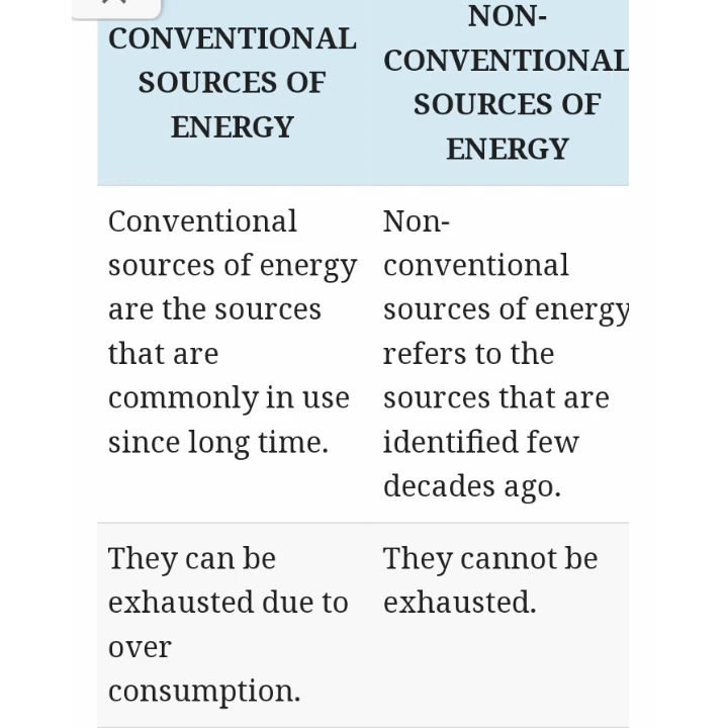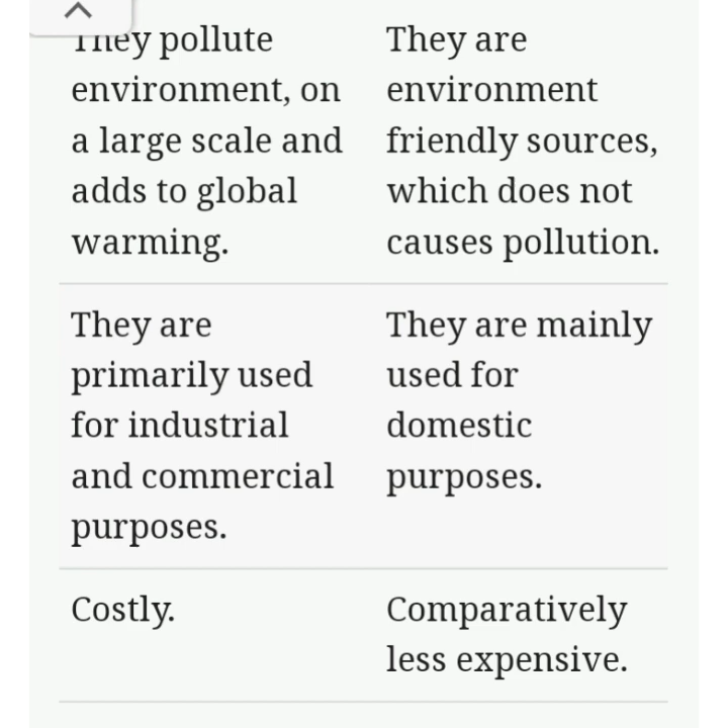Now let's compare conventional with non-conventional. Conventional has been used for a long time, but non-conventional sources have been identified just a few decades ago. Conventional is exhaustible, but non-conventional is inexhaustible. Conventional pollutes the environment and brings large scale global warming, but non-conventional causes no pollution. Conventional is mainly used for industrial or commercial purposes, while non-conventional can be used for domestic purposes. Conventional is very costly, but non-conventional is less expensive.

Now let's go to our first non-conventional source of energy, that is solar energy. What is solar energy? The energy that we get from the sun is called solar energy. We traditionally use solar energy for drying clothes, obtaining salt from seawater, and drying food grains.

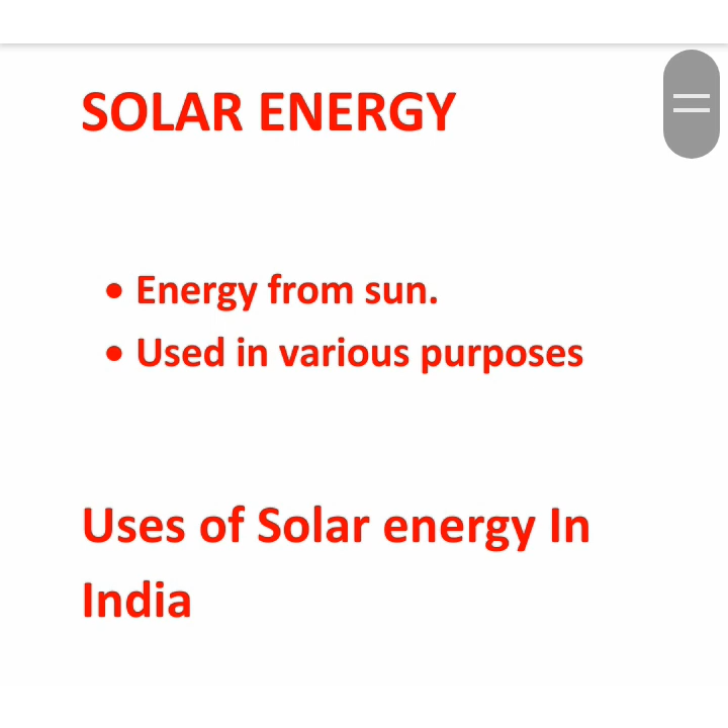Considering our country's location, it is advantageous for harnessing solar energy because it receives a higher amount of solar energy equivalent to 5,000 trillion kilowatt hours per year. The location on the Tropic of Cancer is one of the best advantages, which gets 300 clear sunny days in a year.

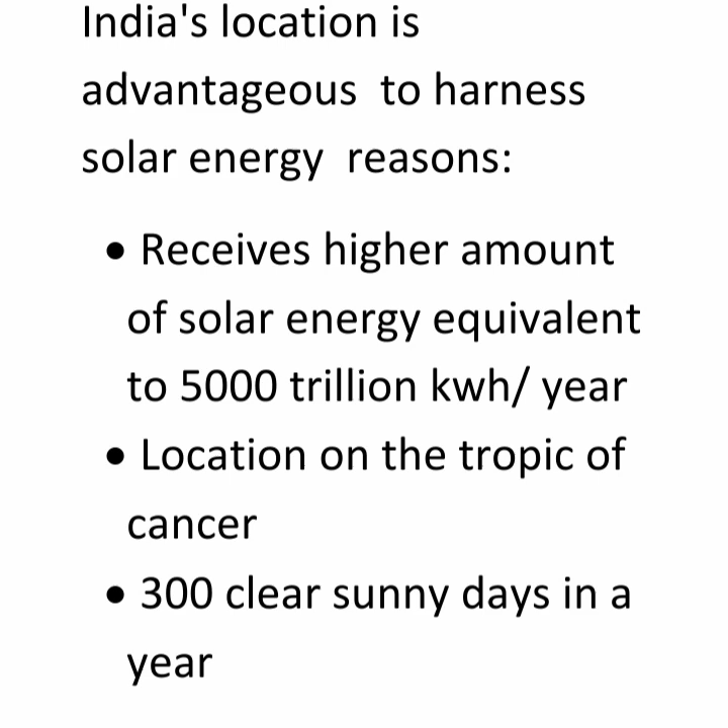Several techniques have been developed in India for harnessing solar energy. Our first device is solar cells, also known as photovoltaic cells. These cells are made up of thin wafers of semiconductor materials like silicon and gallium. When radiation strikes this device, the energy of the sun is directly converted into electricity.

Solar cells are used in many devices like calculators, electronic watches, street lighting, traffic signals, water pumps, and many more. Now the solar cooker.

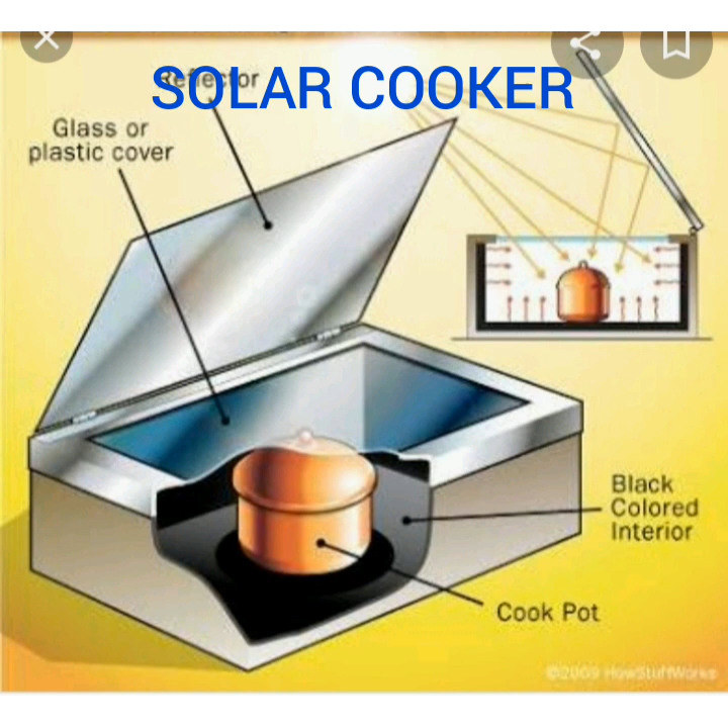The solar cooker is an insulated box with thermocol lining from inside, fixed with aluminium and painted black from inside. It is covered with a glass sheet, and the lid is made of a mirror. The glass sheet helps trap heat, and the mirror helps reflect light rays into the box. The container to be cooked should be painted black from outside and placed inside the box.

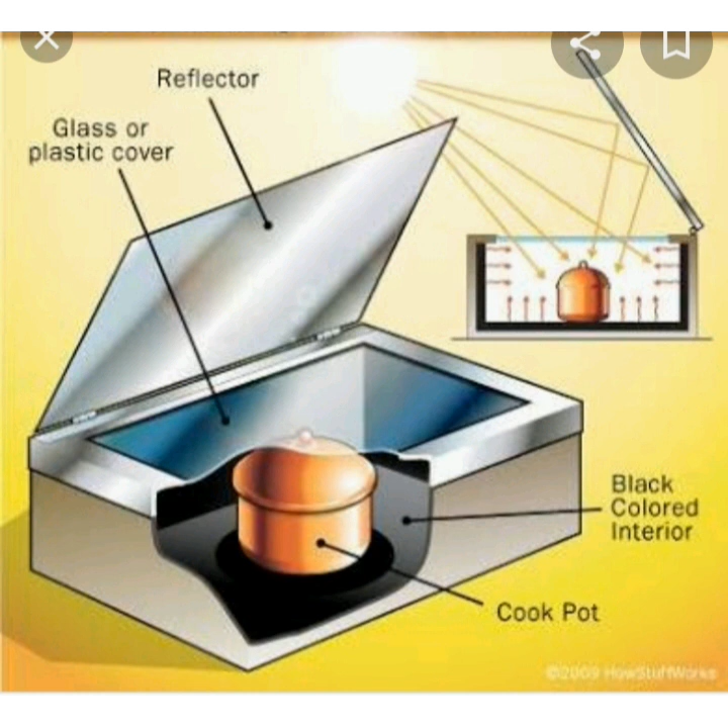The box is kept open in the sunlight. The energy from the sun enters through the glass sheet into the box, but it cannot escape because of the glass sheet. Thus, more and more heat is trapped, and this is how food is cooked in the solar cooker.

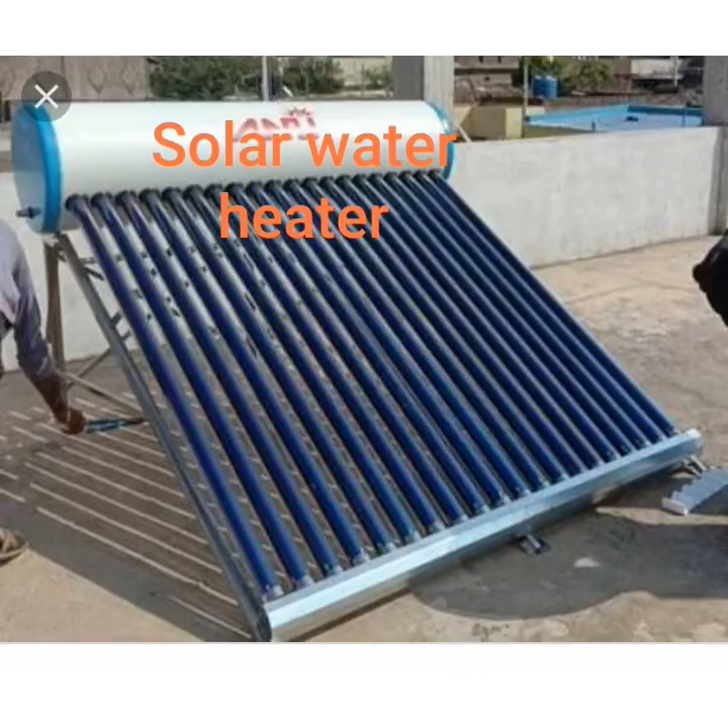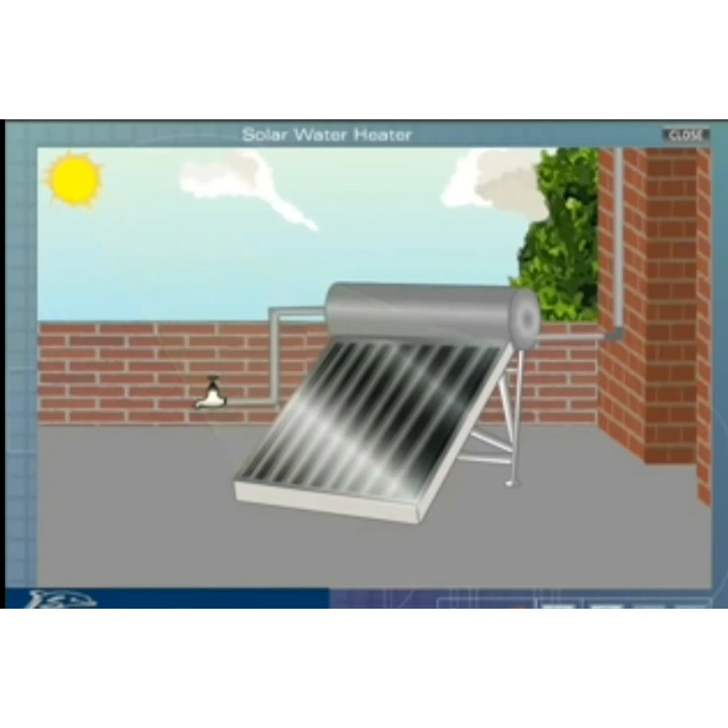Next, the solar water heater. It is one of the most successful applications of solar energy, used in the field of heating water. Now let's see the working. The solar water heater consists of an insulated box painted black from inside.

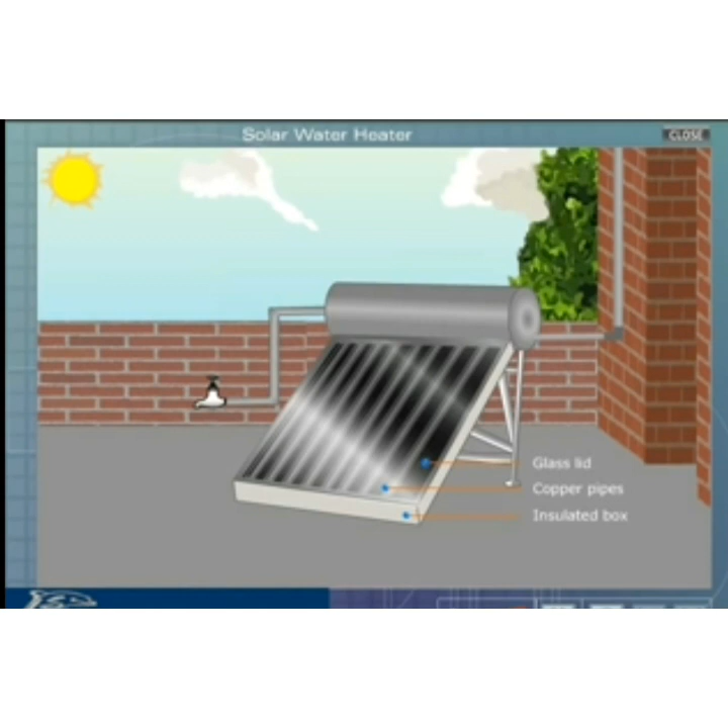In this box, copper pipes are fitted in the form of a coil, and these pipes are painted black from outside. The box is covered with a glass lid to prevent heat loss due to convection and radiation. The ends of the pipe are connected to the storage tank. Cold water enters the storage tank from the bottom and flows into the copper tubes.

The infrared radiations from the sun get trapped inside the box. As a result, water inside the copper pipes gets heated and becomes lighter. The heavier cold water from the storage tank, at a relatively lower temperature, flows down into the copper pipes, and the lighter hot water flows into the storage tank. This circulation continues, and the process by which water gets heated is known as the thermosiphon effect.

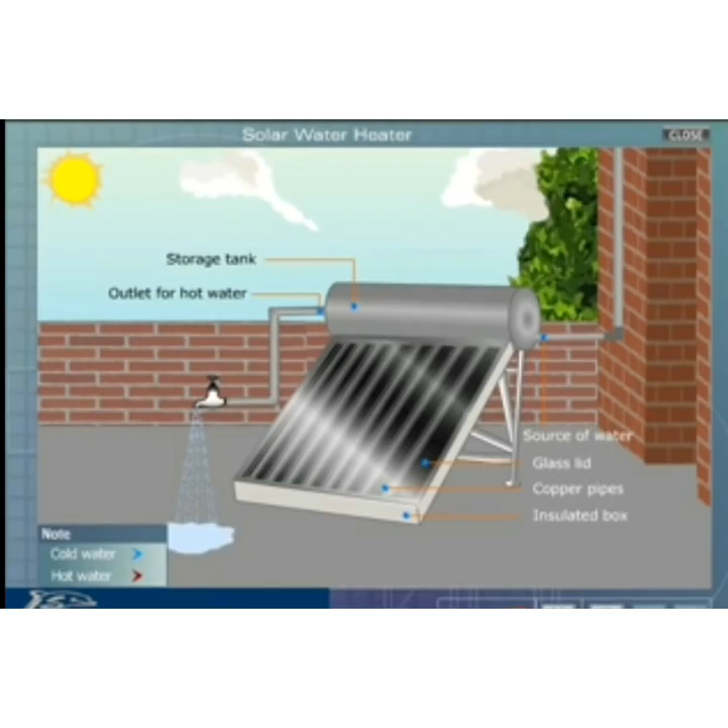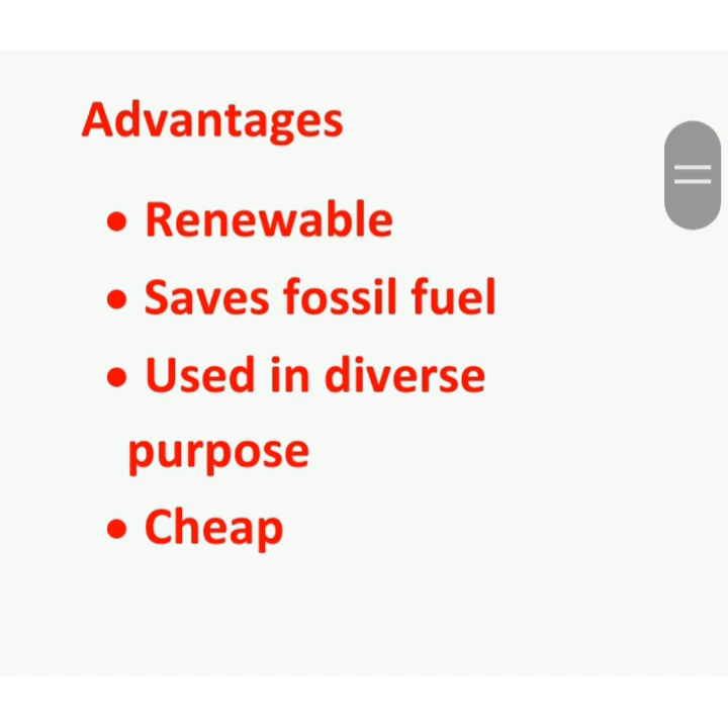Thus, we get hot water by trapping solar energy, which is renewable, non-polluting, and abundantly available. The advantages of solar energy: it is renewable, it saves fuel, and it is used for diverse purposes like extracting energy, electricity, and distilling water. It also saves fossil fuels and is cheaper.

Moving to our next non-conventional source of energy, that is wind energy. Wind is an inexpensive, reliable, non-polluting source of energy for generating electricity. Wind energy is generated from moving air, that's wind, mostly with the help of windmills.

Wind energy is obtained by making use of a windmill, where the blades rotate due to the force of the wind. The rotational motion of the blades drives a number of machines like water pumps, flour mills, and electric generators. A number of windmills are installed in a definite pattern, called a cluster or wind farm, to generate a large amount of electricity. Wind farms are installed in coastal regions, open grasslands, or hilly regions.

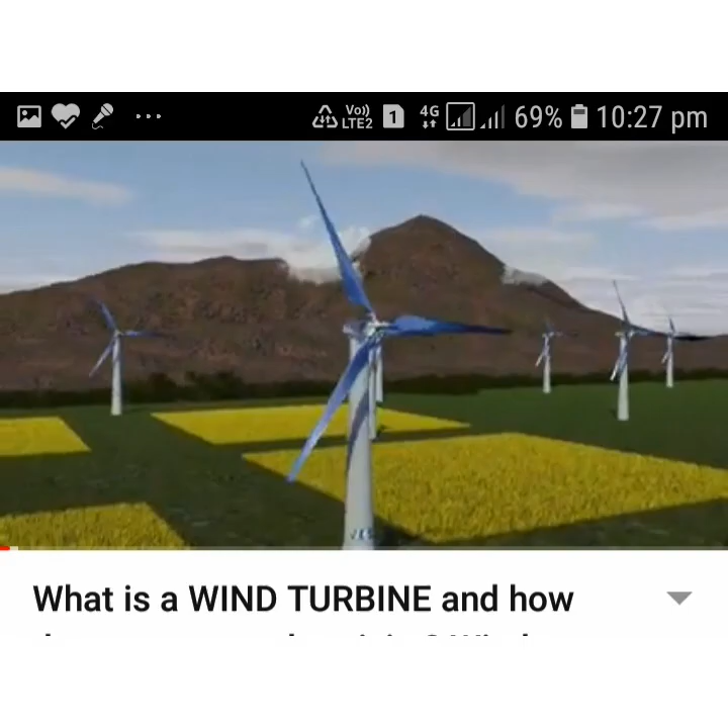India's wind energy program is the fifth largest in the world after Germany, Denmark, USA, and Spain. In India, the largest wind farm cluster is situated from Nagercoil to Madurai in Tamil Nadu. Besides this, Andhra Pradesh, Gujarat, Karnataka, Kerala, Lakshadweep, and Maharashtra have important wind farms.

Advantages of wind energy: it is a renewable source of energy, as we all know, and it can be utilized again and again. It is the cleanest form of renewable energy which produces no pollution at all. It reduces our dependence on fossil fuels, and it helps in generating electricity which can be used for domestic purposes and reduce monthly electric bills.

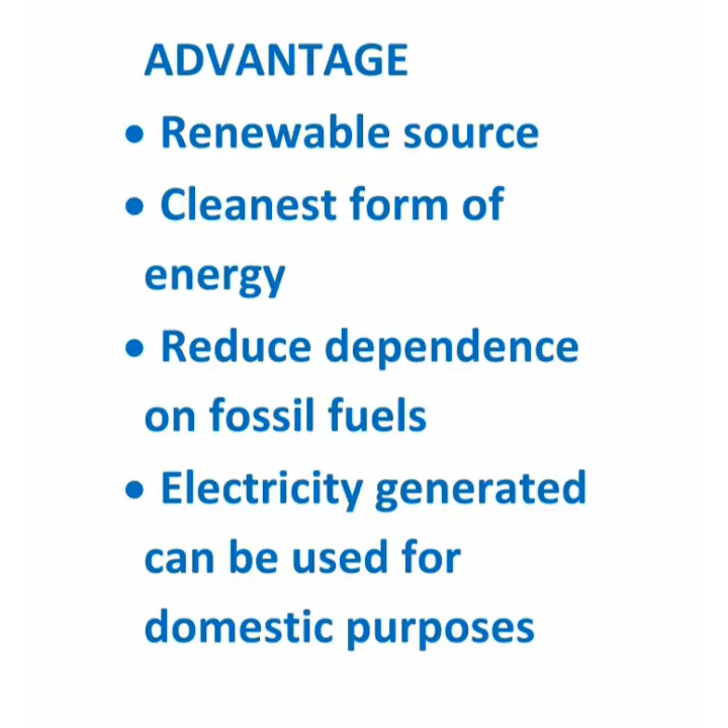Let's go to nuclear power. The nuclear power is another non-conventional source of energy. The energy is stored in the nuclei of the atoms of naturally occurring radioactive elements like uranium, thorium, and plutonium. The nuclear energy is utilized to generate electricity in the nuclear reactor or nuclear power plant.

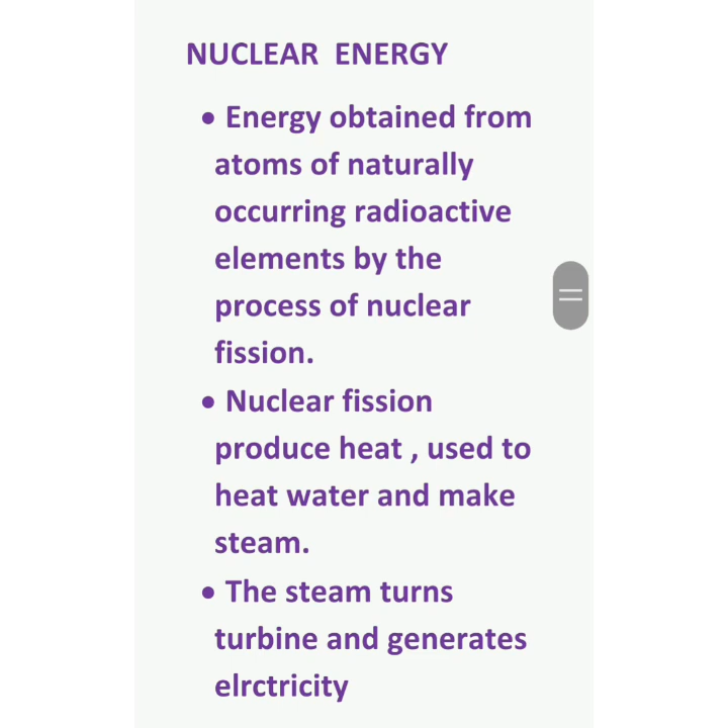Now let's see the working of the nuclear power plant. What is the block diagram of the nuclear power plant? We can see here the different components of the nuclear power plant. The main component of the nuclear power plant is the nuclear reactor, a device in which the process of nuclear fission takes place. The uranium-235 is subjected to nuclear fission in the nuclear reactor, and a huge amount of heat is liberated.

This heat then goes to the heat exchanger. For that purpose, a coolant is used, which can be of gas or liquid type. The coolant transfers the heat from the nuclear reactor to the heat exchanger, and in the heat exchanger that heat is transferred to the water. When the heat gets transferred to the water, the temperature increases and water gets converted into steam, which is then converted into high pressure steam that rotates the steam turbine.

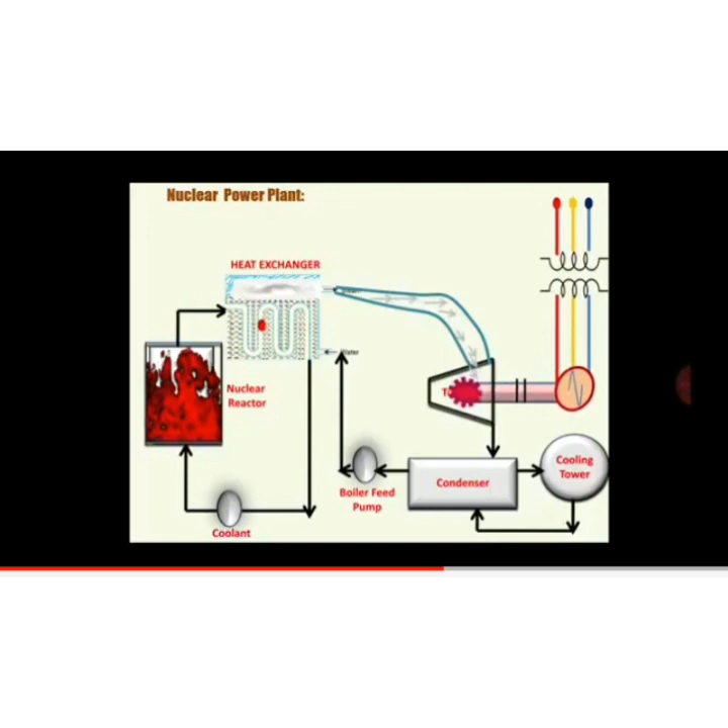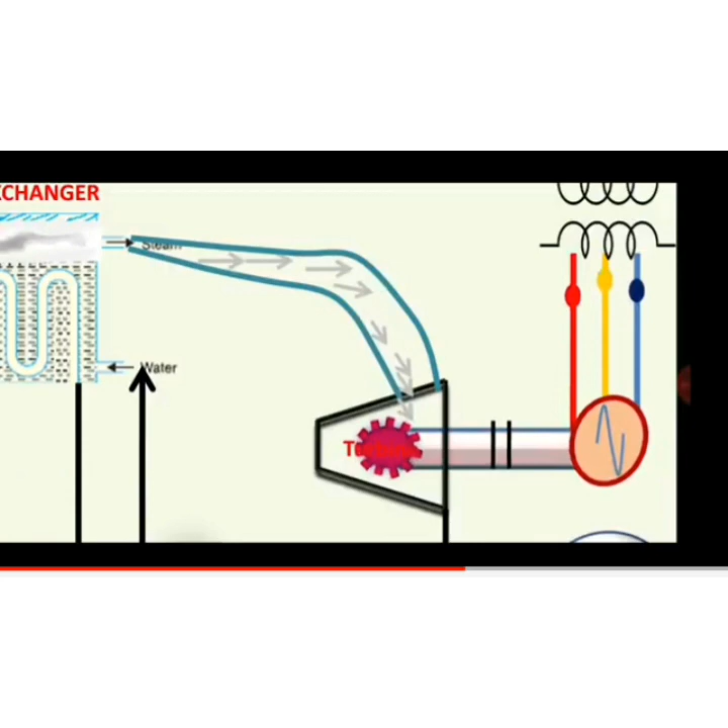The steam turbine is mechanically coupled with the alternator, and as the steam turbine rotates, the alternator also rotates. This alternator converts that mechanical energy into electrical energy, so that electrical energy can be given to the grid. This is the use of the nuclear reactor.

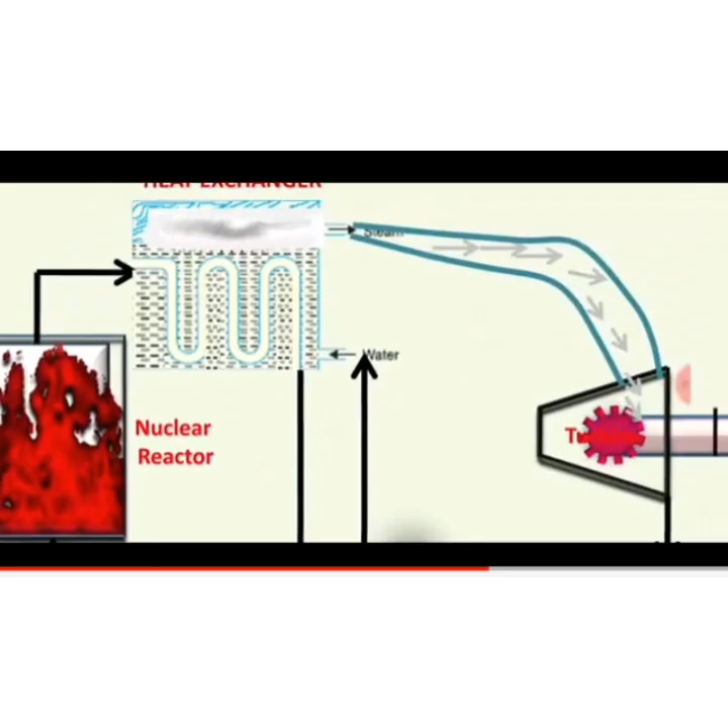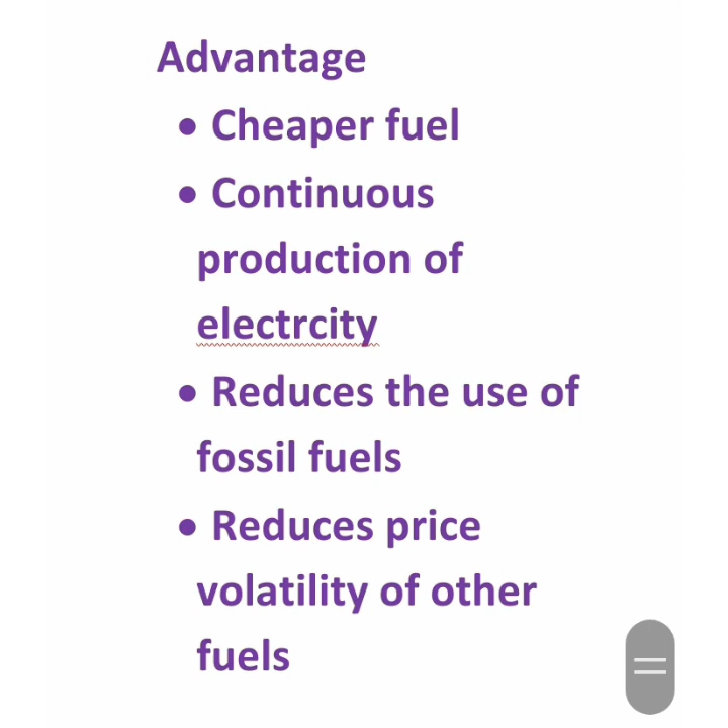Advantages of nuclear energy: it is cheaper fuel, because the cost of nuclear fuel is 20% of the cost of energy generated. It provides continuous production of electricity, which reduces dependence on fossil fuels. It also reduces the volatility of fuels such as petrol, because a nuclear power plant generates electricity for almost 90% of the annual time.

Next non-conventional source of energy is biogas, a gas produced by the anaerobic degradation of plants and animals, composed of methane, carbon dioxide, hydrogen and hydrogen sulfide. Anaerobic degradation means breaking down of organic matter by bacteria in the absence of oxygen. The fermentation of the waste product is carried out by bacteria which produces hydrocarbon gas, predominantly methane and alcohol.

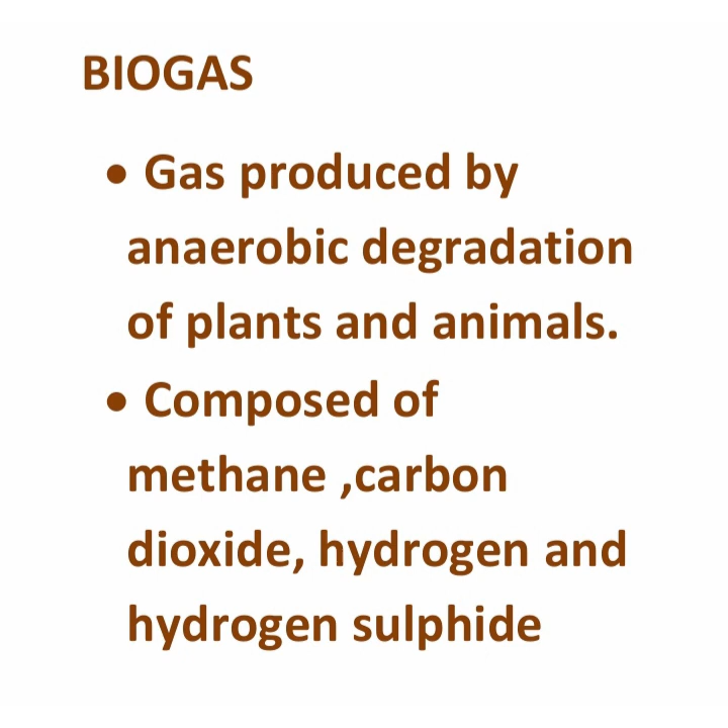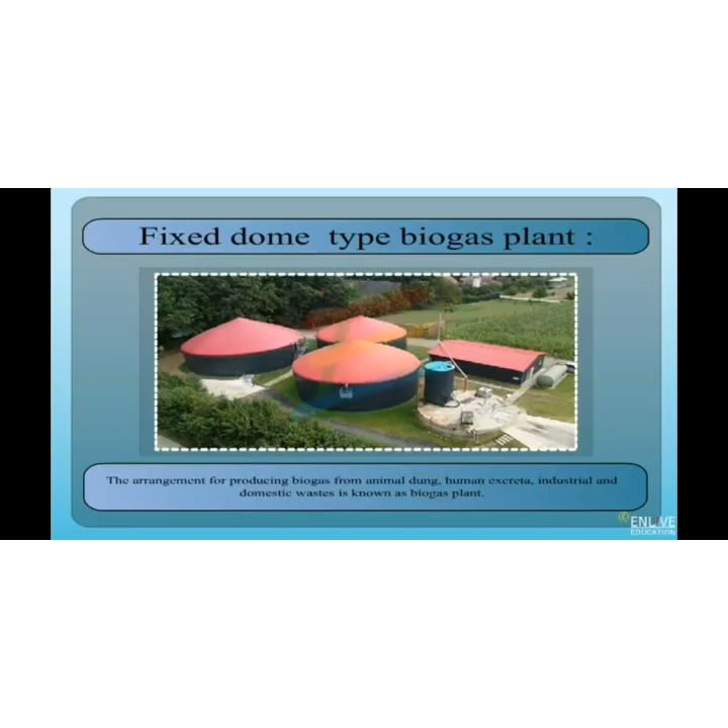Let's see the working of the biogas plant. In India, the dome-shaped biogas plant is more popular. Let's see the working of the fixed dome type biogas plant. The arrangement for producing biogas from animal dung, human excreta, industrial and domestic waste is known as a biogas plant.

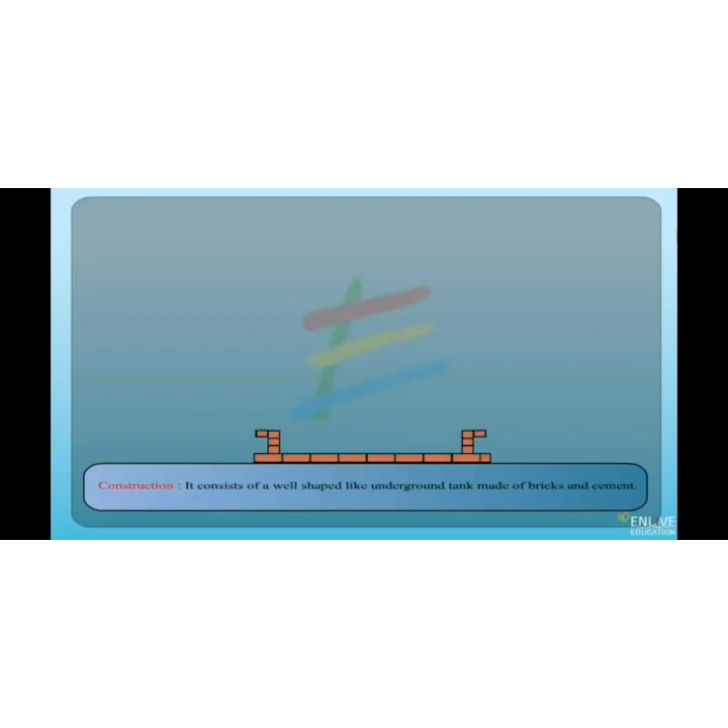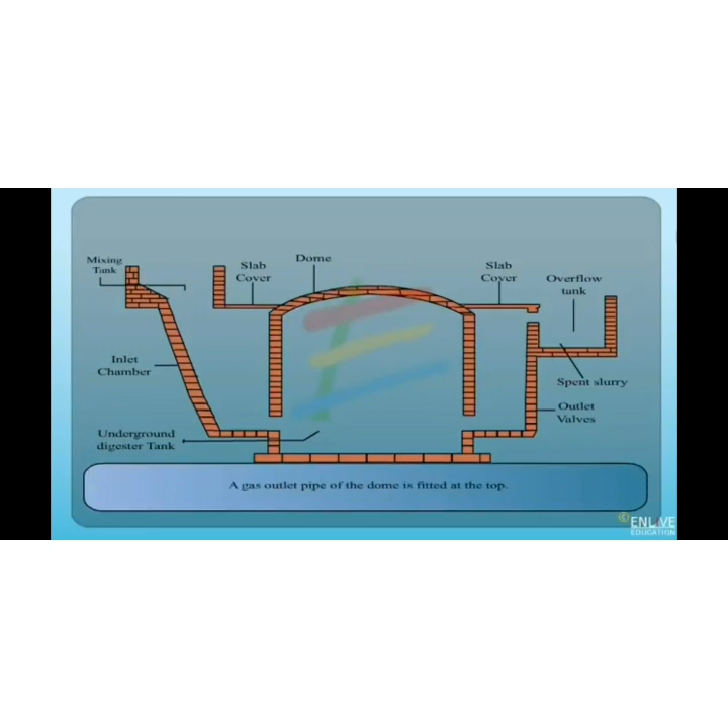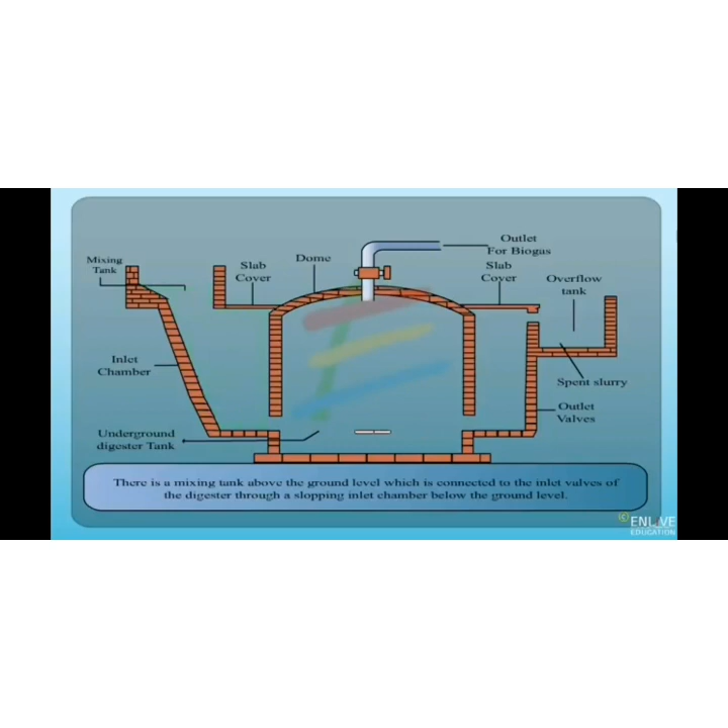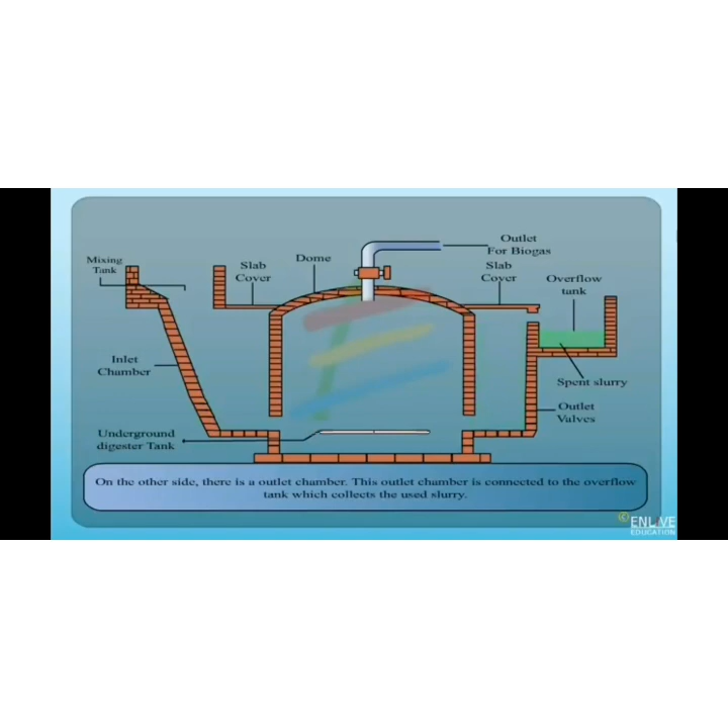Construction: it consists of a well-shaped, underground tank made of bricks and cement, called the digester tank, which has inlet and outlet valves. The roof of the tank is dome-shaped, and a gas outlet pipe is fitted at the top of the dome. There is a mixing tank above ground level which is connected to the inlet valves of the digester through a sloping inlet chamber below ground level. On the other side there is an outlet chamber, which is connected to the overflow tank that collects the used slurry.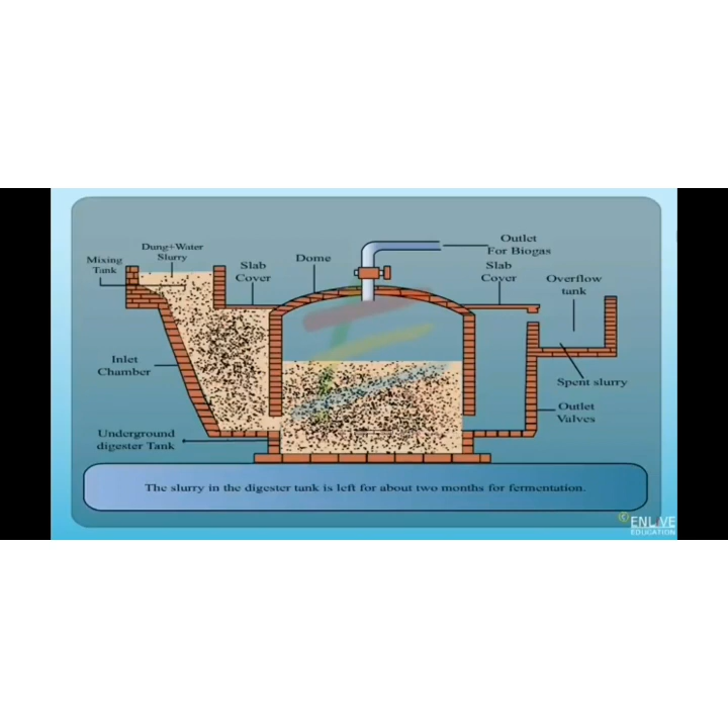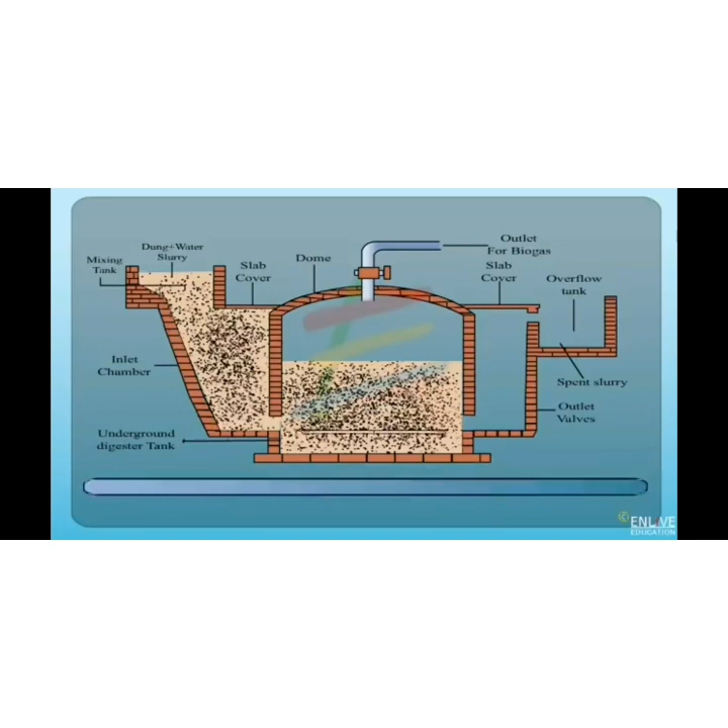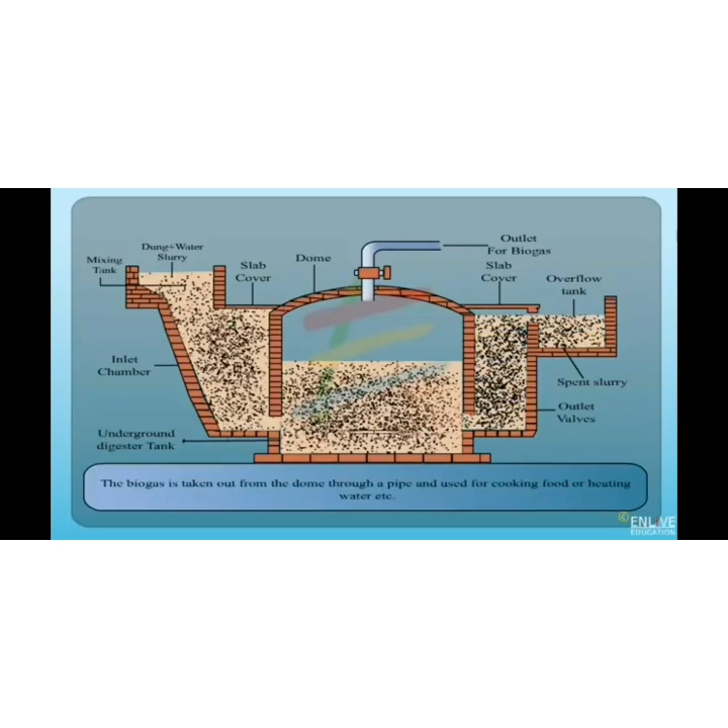Working: animal dung is mixed with water to make slurry in the mixing tank. This slurry enters the digester tank through the inlet chamber, and is left for about 2 months for fermentation. Anaerobic microorganisms are responsible for fermentation which produces biogas, and it is collected in the dome. It exerts a large pressure on the slurry and forces it to go into the overflow chamber. The biogas is taken out from the dome through a pipe and used for cooking food or heating water, etc.

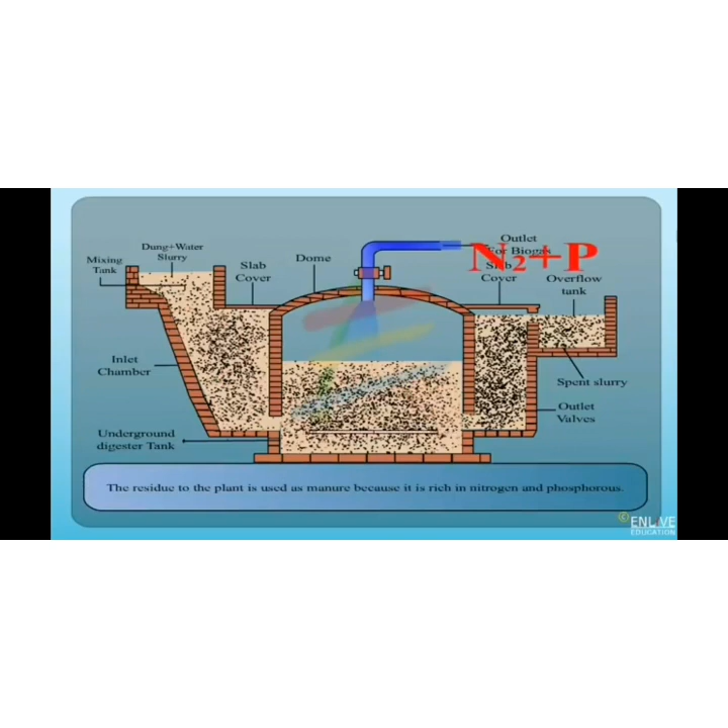The residue of the plant is used as manure because it is rich in nitrogen and phosphorus. Advantages of biogas plant: biogas is a clean fuel, non-polluting and cheap. There is a direct supply of gas from the plant, so there is no storage problem, and the sludge left behind is rich in fertilizer containing bacterial biomass.

The Ministry of Non-Conventional Energy Sources has been promoting the biogas program in India, and it has set up a number of biogas plants across the country.

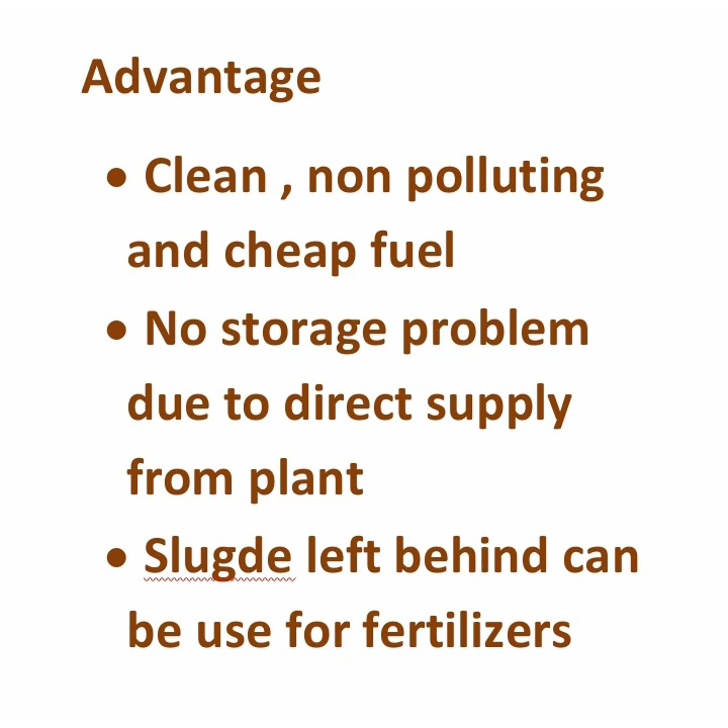With this, I finish today's chapter, chapter 14, non-conventional sources of energy. What is required and important is shown in the video. For advantages, you have to learn more about the raw materials for each energy. Please go through the chapter properly. Okay, thank you.